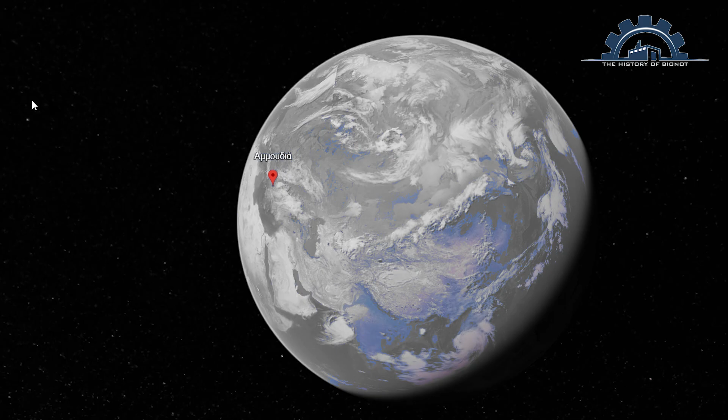Ammoudia Serres, 1950. The land breathes at the dawn of a new era. In this small village of the prefecture of Serres, a young dreamer, Elias Nottas, turned his passion for construction into a life's work, giving shape to his dreams. A passion that would define his future.

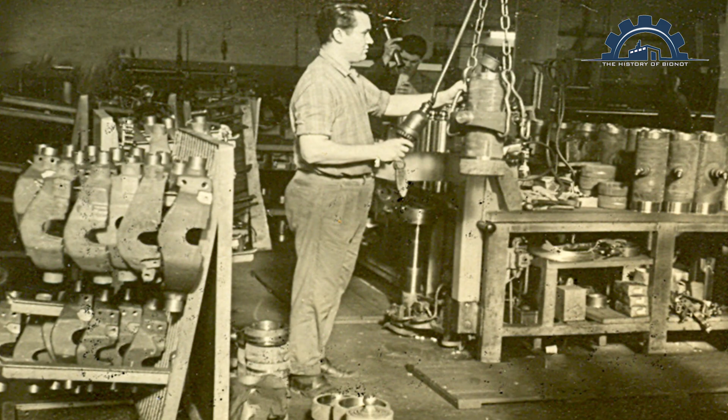At 15, he worked in Heraclea Serres, gaining his first knowledge. His contact with the world of construction opened new horizons for him. The thirst for knowledge and the love of work led him, in the mid-1950s, to Germany, where he spent 3 years learning and testing his abilities in large construction companies.

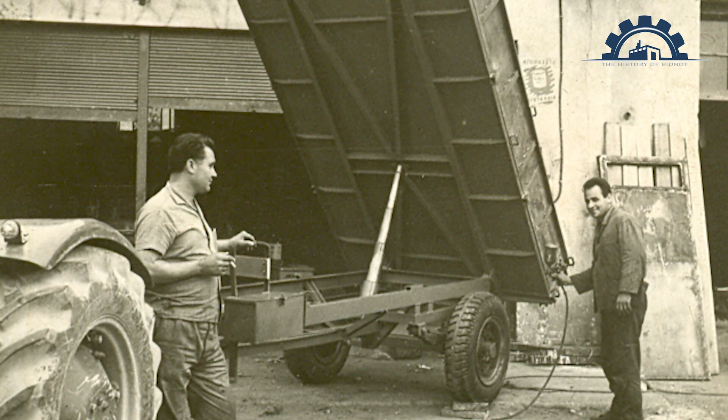Returning to Greece at the end of the decade with many dreams and ambitions, but also with the invaluable knowledge of engineering and the German work ethic, Elias Nottas decided to specialize in the manufacturing of agricultural machinery to support the farmers of the prefecture of Serres with dedication and passion.

His foresight and faith in his work led him, at the beginning of the 1960s, to Thessaloniki. And so BIONOT was born, whose heart was already beating strongly.

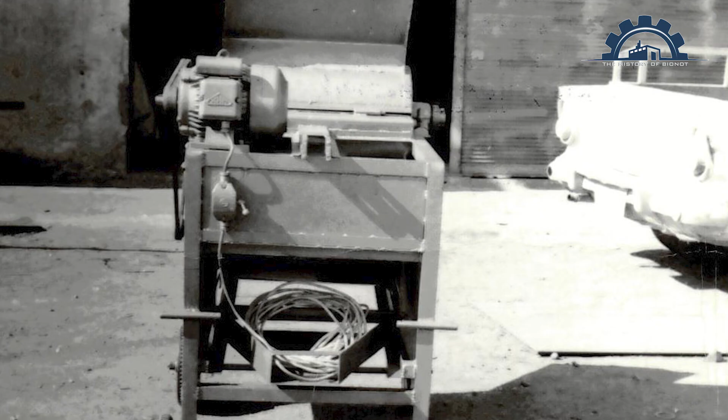At a time when the extensive peanut crops in Ammoudia were beginning to shape the landscape and the local economy, Elias Nottas saw a new opportunity. Inspired by the dynamic growth of peanut cultivation in Ammoudia, he directed his technical expertise towards the development and manufacturing of machines dedicated to peanuts.

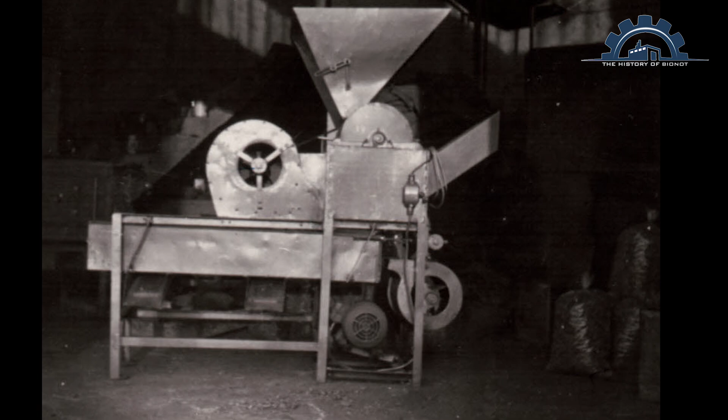Such as small crushers, various custom-built machines, and threshing machines, which quickly became a point of reference for farmers in the region, breathing new life into the way crops were cultivated, drastically reducing working hours and increasing productivity.

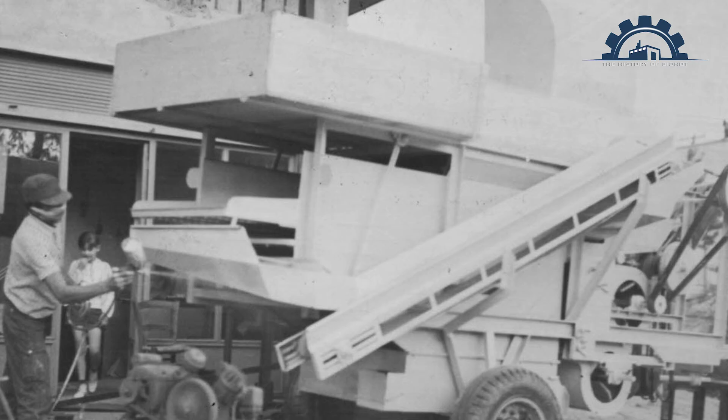Day by day, BIONOT's machines became more and more well-known. The demand for expanding applications to other crops, as well as larger constructions, was inevitable.

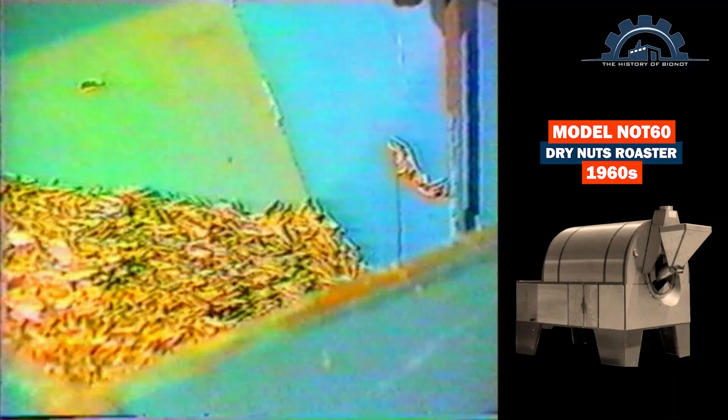Meanwhile, Elias Nottas, studying the production chain of nuts, discovers needs in the processing sector, taking small but dynamic steps towards the secondary sector. So, he manufactures the NOT60 rotary nut roaster, solving perhaps the biggest problem of small processing units seeking larger-scale production.

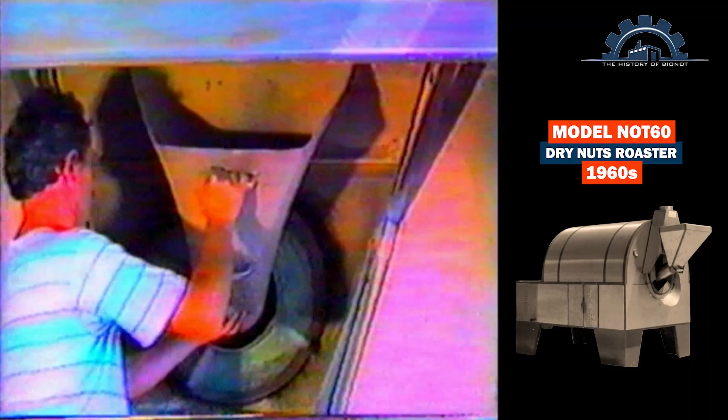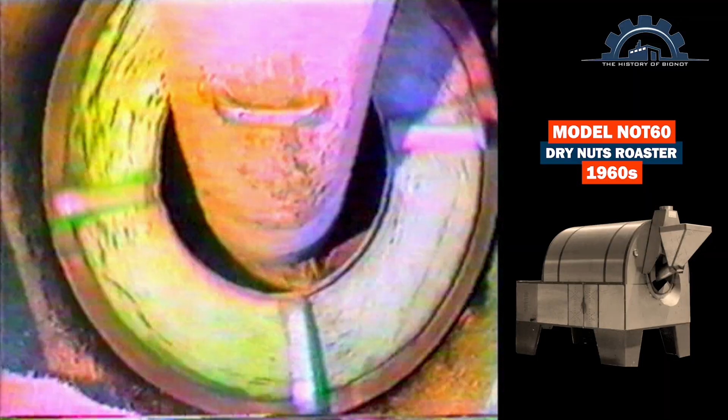Each creation brought with it the promise of quality and a vision for the future, building solid foundations for what was to come. With the same passion and the same dedication, BIONOT continued to pioneer in the field of engineering, keeping alive the legacy and the dream of Elias Nottas.

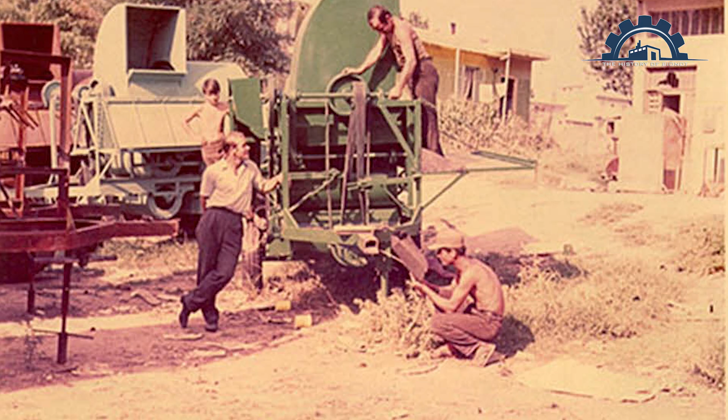The 1970s are marked by the entry of Elias, son of Elias Nottas, into BIONOT. Elias does not choose the easy path. He studies mechanical and electrical engineering. But his true university is beside his father, where he learns that a machine doesn't just need precision, it needs a soul.

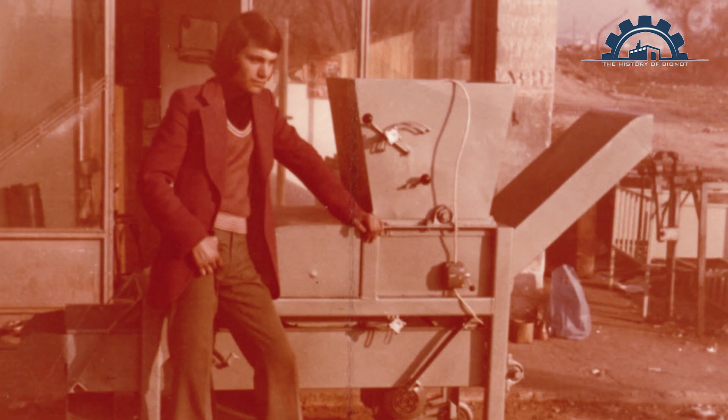In the mid-decade, BIONOT becomes a field of creative dialogue between the experience of Elias and the enthusiasm of Elias. It is the era when the Greek land calls for help. The first coffee roasting machines bring the aroma of success, and as the primary sector modernizes, BIONOT is there to provide solutions.

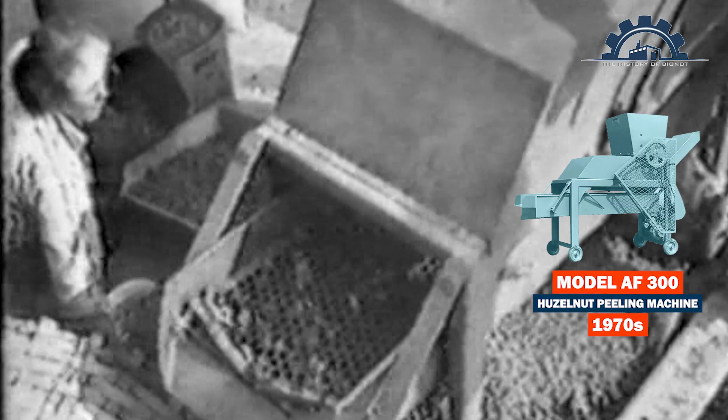The company manufactures specialized machines, such as peelers for hazelnuts, peanuts, almonds, and pistachios, as well as for every nut that has its own unique characteristics. BIONOT's know-how continues to grow.

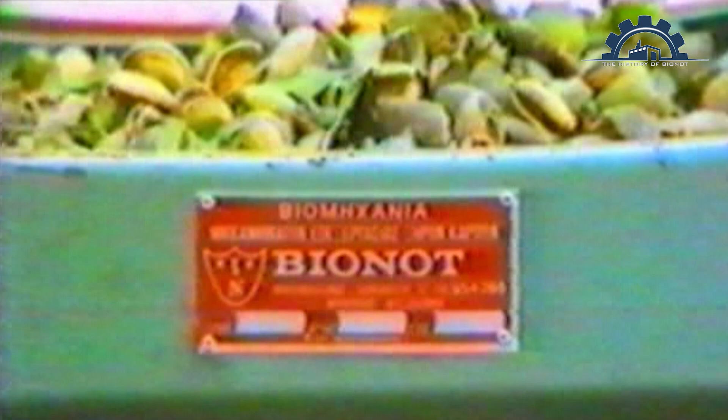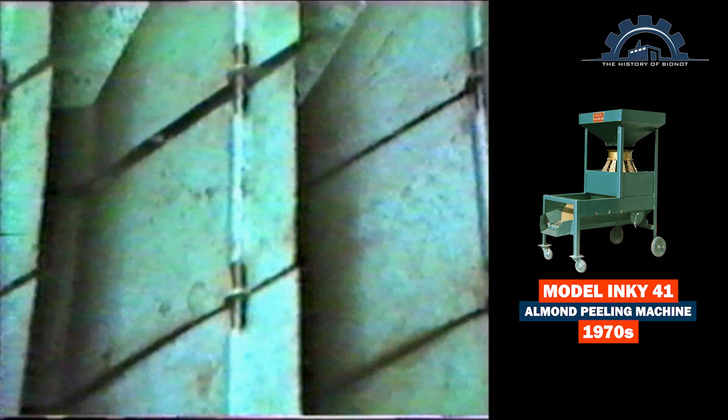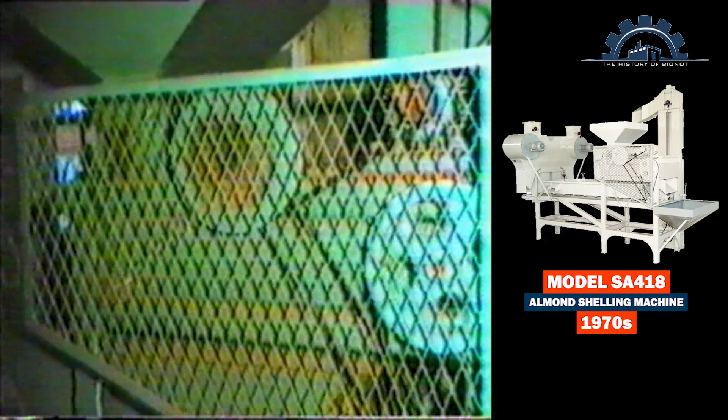As the years go by, the challenges multiply. The company's catalog begins to fill with machines that will become milestones. Almond crushers, peeling machines, and hazelnut blanching units prove that BIONOT does not simply manufacture machines, but development tools for the Greek producer.

Closing the 1970s, the company is no longer a small workshop, but a force preparing for the big leap.

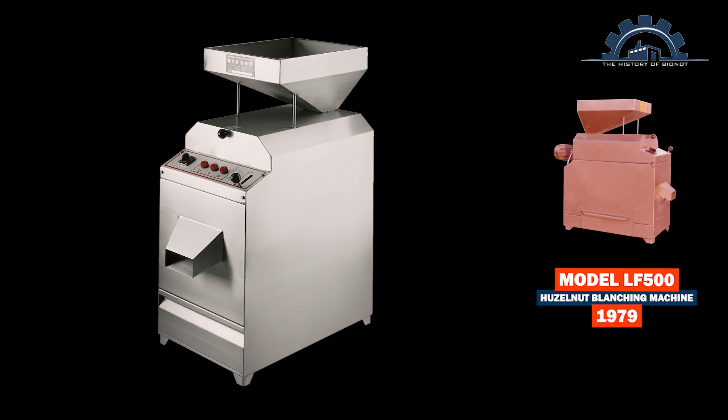'80 finds BIONOT turning a new page. The need for greater production and organization leads to the transfer of the company to new, company-owned facilities in Deimos, Thessaloniki. It is not simply a relocation, it is the foundation of a dream. In the fresh air of Deimos, the creativity of Elias Nottas finds its home.

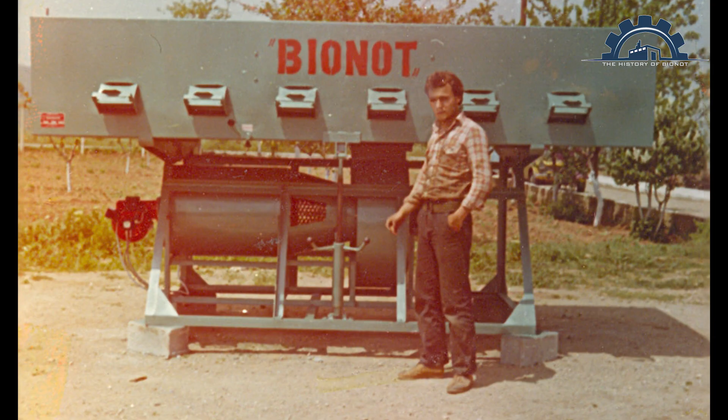The decade begins dynamically with the AG2000 nut dryer, a pioneering machine that, for the first time, gives the producer absolute control over the quality of their crop.

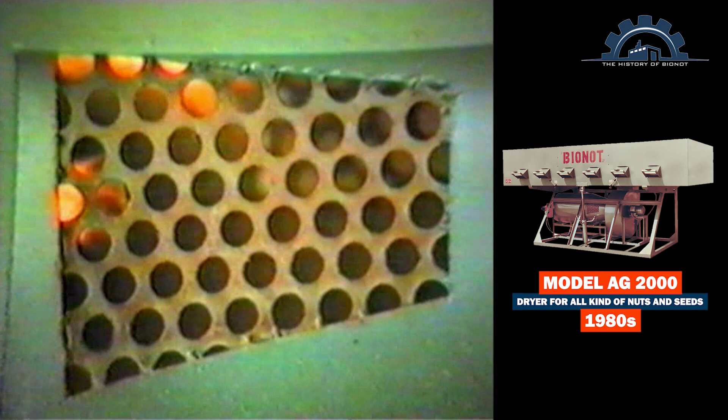By 1985, the factory is buzzing with life. BIONOT no longer offers only individual machines, but integrated solutions. Complete cracking lines for hazelnuts and almonds are designed and built, as well as a specialized peanut sorting line.

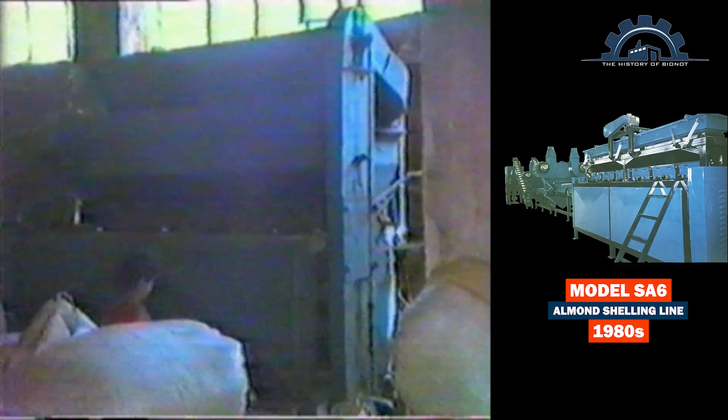The precision of manufacturing becomes the company's hallmark. Every screw, every belt, every motor is fitted with the stamp of a family business that refuses to settle for anything less than perfect.

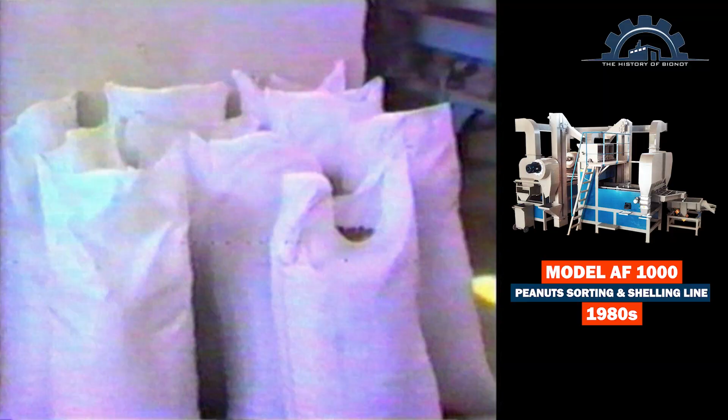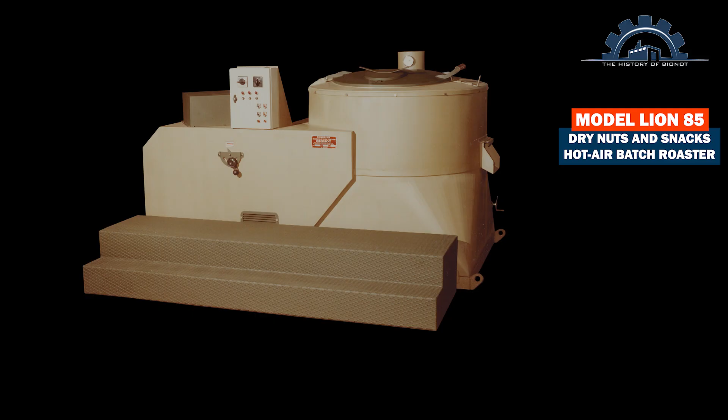1985, the year that divides BIONOT's history into before and after. BIONOT makes a grand entrance into the secondary sector and presents the Lion 85 air thermal oven. The Lion 85 was not just another oven, it was a revolution in the way of roasting.

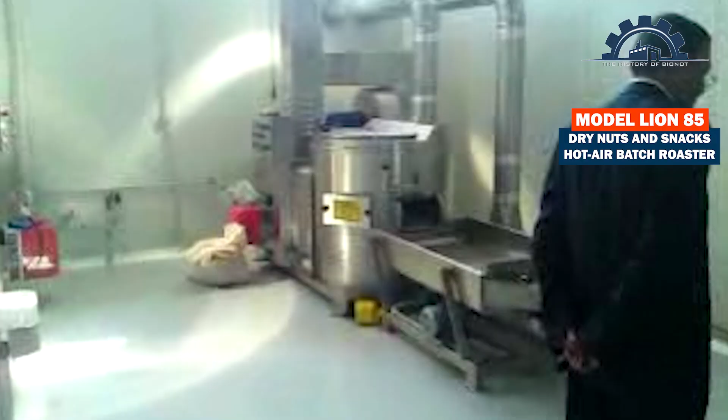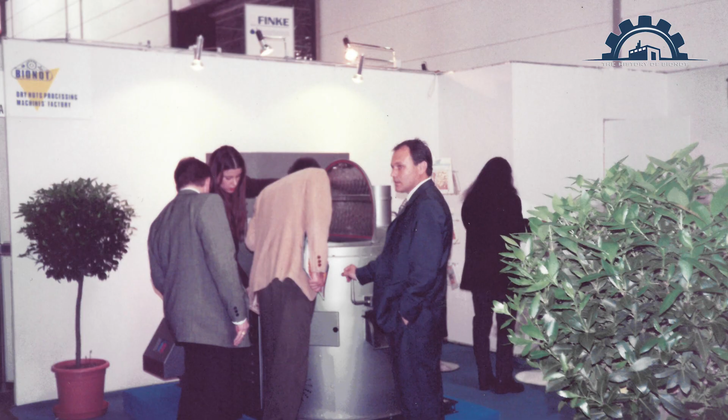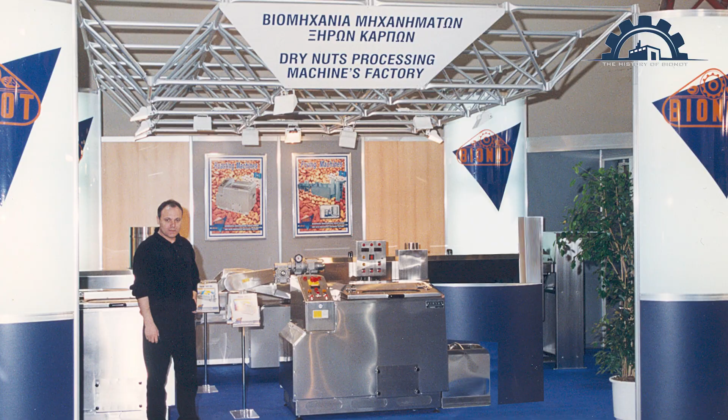With the Lion 85 as its passport, BIONOT takes part in the largest international trade fairs. The company takes off. Orders begin to pour in, and BIONOT transforms from a local force into an international ambassador of Greek engineering. The decade closes with the promise that the future has no limits.

The 1990s find BIONOT on a trajectory of unstoppable ascent. The name BIONOT is known not only to Greek processors and farmers, but to the major food industries worldwide. The company takes a strategic step into the secondary sector. Innovation takes shape with the KNOT 96S continuous flow fryer, which transforms nut processing.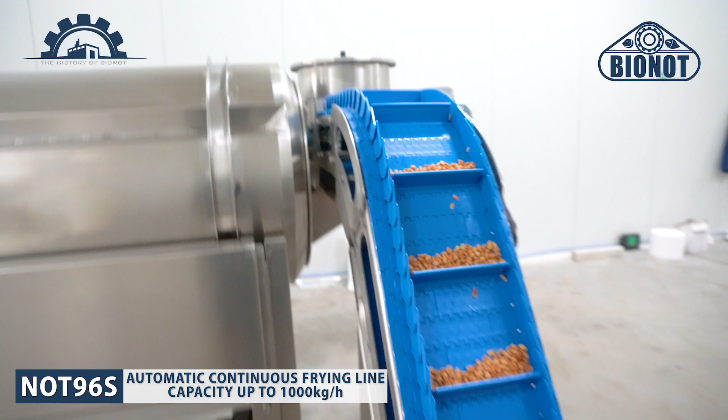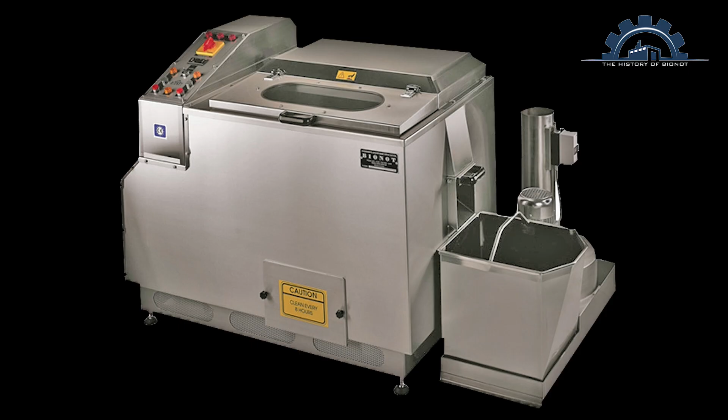Meanwhile, the NHL series of electric batch ovens comes to embrace small and medium enterprises and workshops, proving that BIONOT is close to every scale of production.

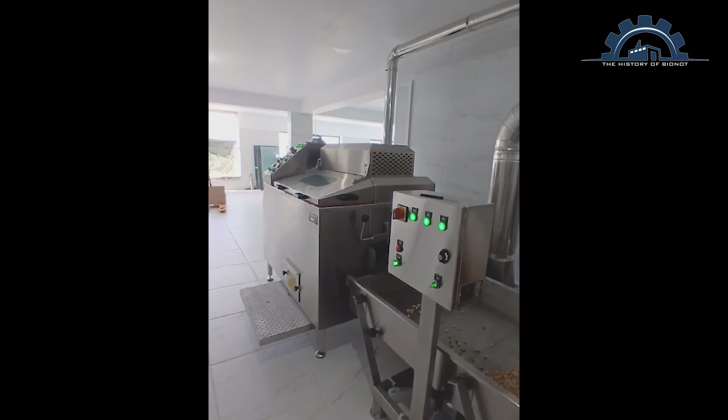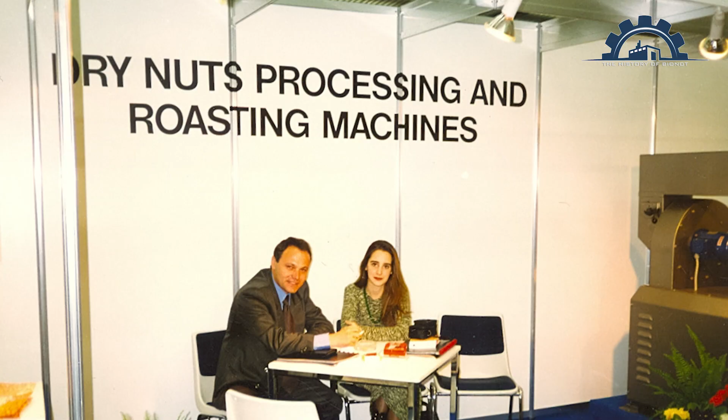With participations in international trade fairs now established on an annual basis and the results proving more than worthwhile, a flood of orders leads to the need for more space. In 1995, the expansion of the existing factory begins, and in 1997, the company moves into its new home, a state-of-the-art factory ready to welcome the future.

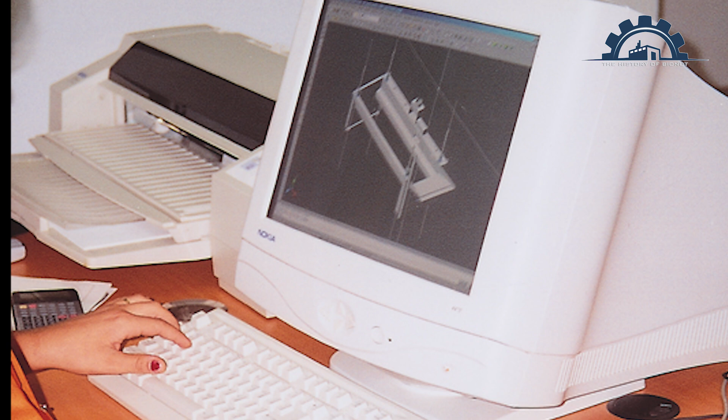The information age has arrived. While many still hesitated before technology, BIONOT embraced it. Already from 1997, its engineers are trained in computer-aided design, while the company acquires one of the first websites in the industry in Greece. BIONOT does not simply manufacture machines, it manufactures tomorrow, combining the engineer's passion with the precision

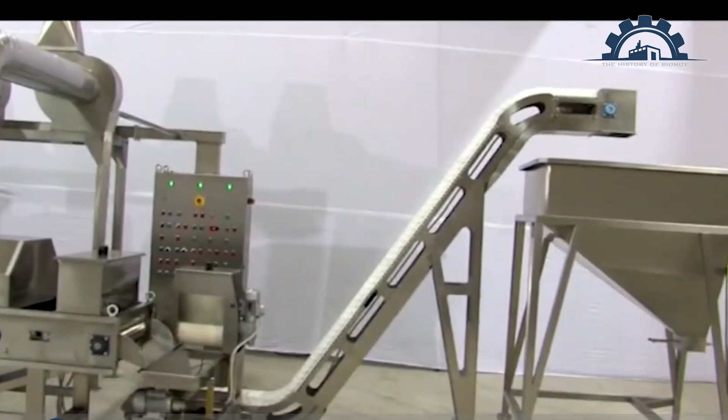of software. At the end of the 1990s, Elias Nottas understands that proper production requires vertically integrated solutions. The range is enriched with peripheral transport and storage equipment. BIONOT now creates living organisms of production, where each machine connects harmoniously to the next.

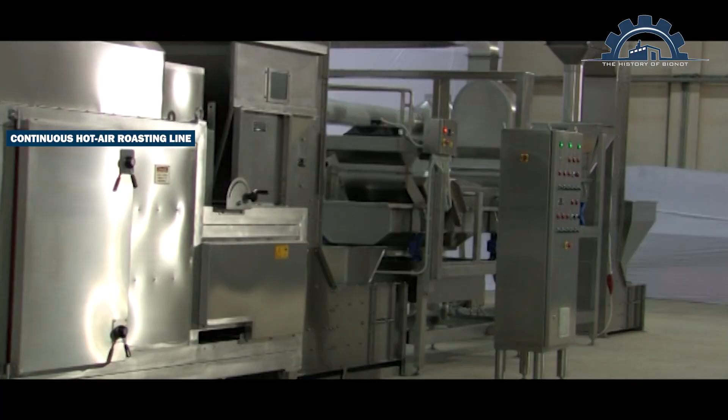The new millennium dawns with an achievement that will go down in history: the KNOT 2000 Continuous Flow Oven. It was the machine that opened the door for BIONOT to enter the world's largest industries. Speed, flexibility, and a roasting quality that had no precedent.

But BIONOT does not stop there. It designs the KNOT 110, the world's first oven exclusively for sesame. BIONOT no longer follows global trends, it creates them.

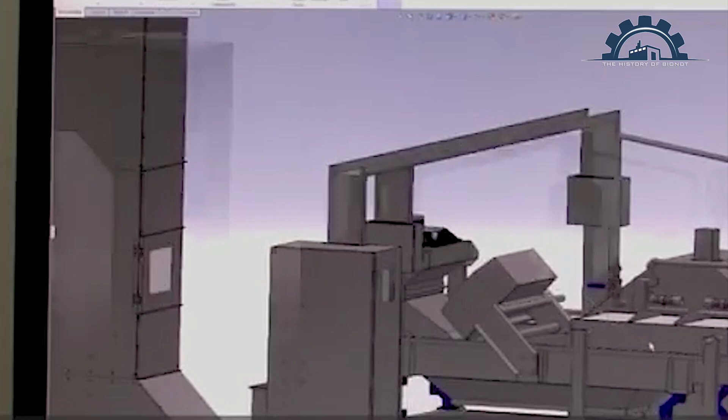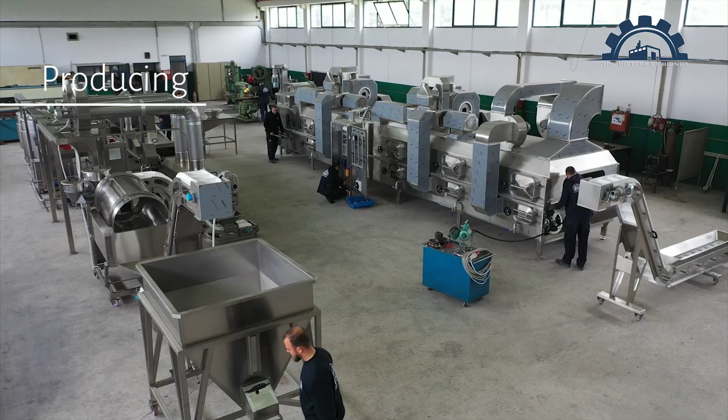After 2005, the company transforms from within. The design rooms fill with the latest generation computers, and investment in research and development becomes the heart of the business. Every successful model is analyzed, improved, and gives rise to new, innovative machines. It is the era when knowledge accumulates and decades of experience are transformed into pioneering applications.

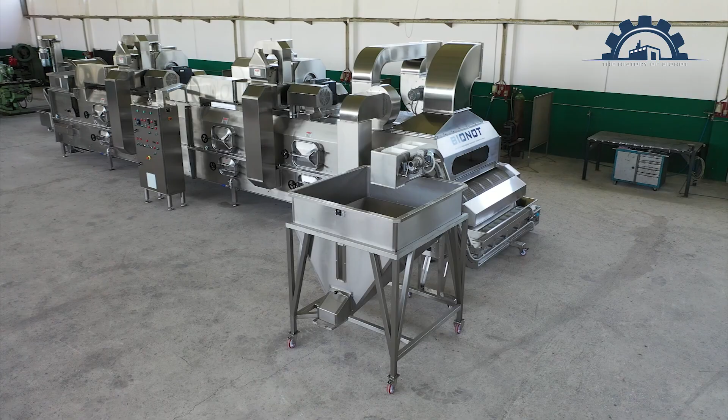The quality of manufacturing is non-negotiable, and the relationship with the customer remains personal, just as it was in the first machine shop of 1960. BIONOT is now counted among the finest companies on the international stage. Participations in international trade fairs are no longer merely visits, but declarations of the superiority of Greek manufacturing ingenuity.

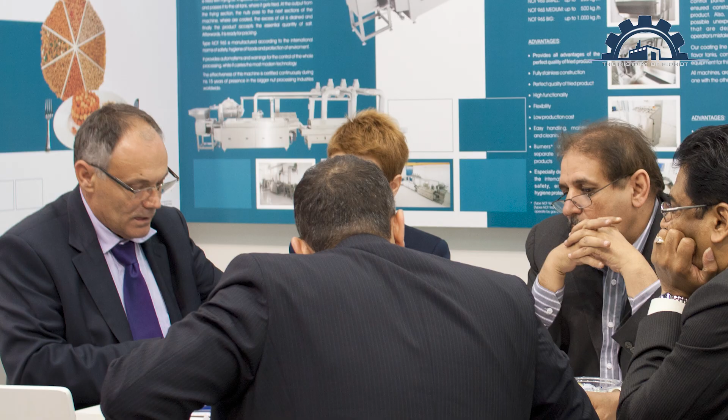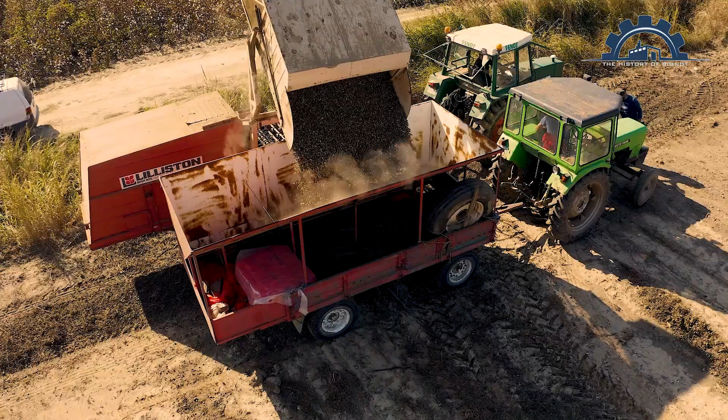With the support of the Cultural Association of Amudia and the farmers of the wider area, they launch a campaign to raise awareness about peanut cultivation. In just 5 years, the production of the prefecture of Serres skyrocketed from 150 to 1,850 acres of peanut cultivation. BIONOT becomes the cornerstone of an entire sector that was in danger of disappearing.

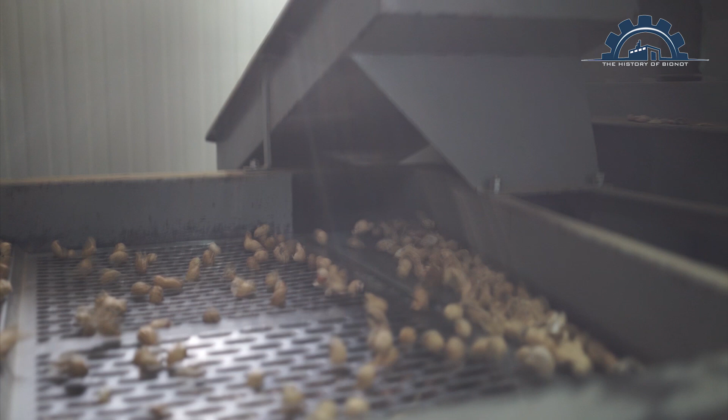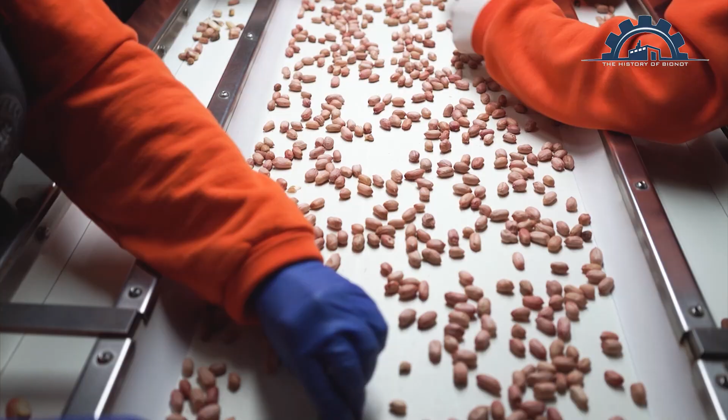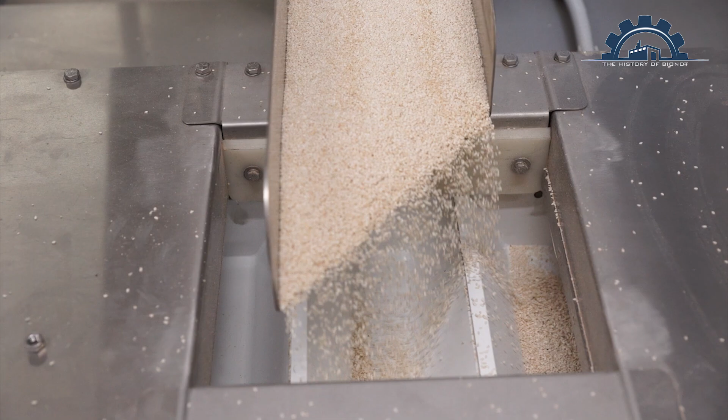BIONOT may have opened many fronts, but production never stops. This decade is defined by large continuous flow lines as well as improvements to nearly all machines, to meet the requirements for energy efficiency, food safety, and worker safety that modern industry demands.

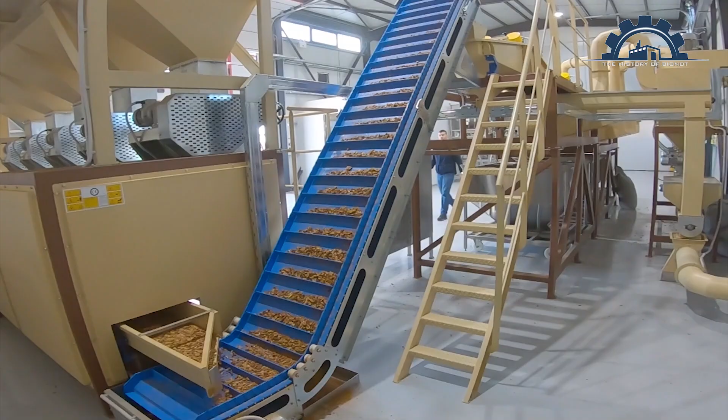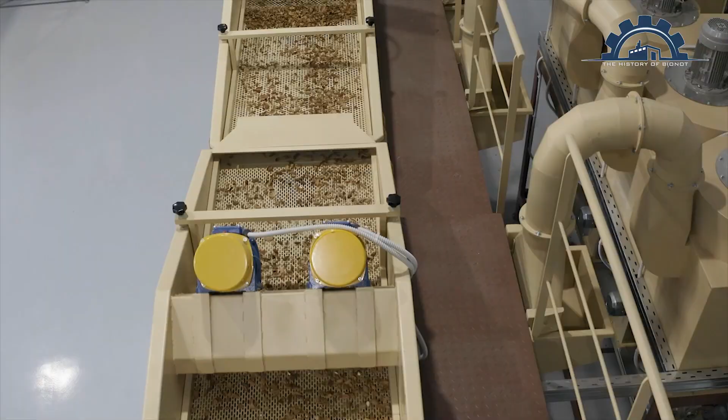Closing the decade of 2010, BIONOT is stronger than ever. With Elias at the helm and the new generation preparing, the company remains a beacon of innovation. It is proof that when love for the craft meets respect for people and nature, the result is not simply a machine, but a legacy that continues to bear fruit.

BIONOT invests more than ever in its people. Through continuous seminars, specialized training, and an uninterrupted research and development, the company's team evolves into a community of experts.

Today, BIONOT stands between the experience of yesterday and the challenges of tomorrow. With the third generation preparing to take the helm, the vision of Elias Nottas, passing through his son Elias Nottas, has remained alive to create machines centered on the customer's philosophy and their needs.

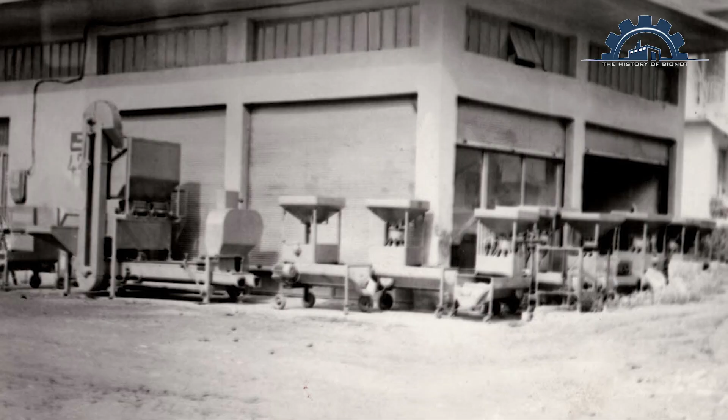From the small machine shop of 1960 to the global presence of today, the journey of BIONOT is proof that the Greek spirit, when combined with knowledge, creates technology that knows no borders. And the story continues.